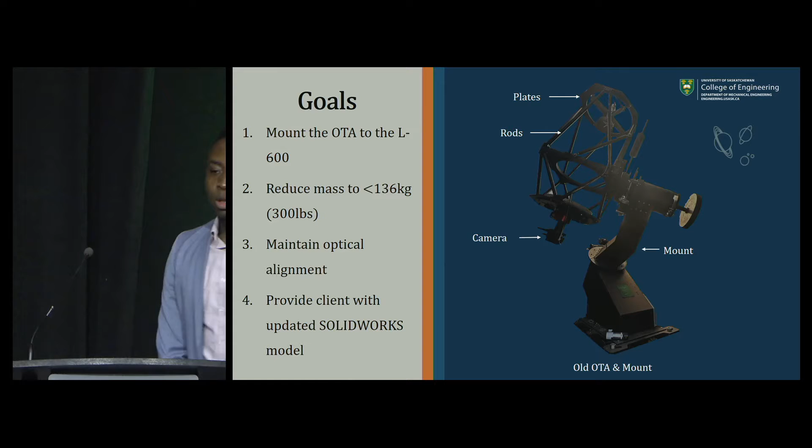In terms of goals for this project, our main goal was to mount the optical tube assembly to the newly purchased PlaneWave L600 mount. In doing so, we needed to reduce the mass of the optical tube assembly to be less than 136 kilograms, the limit of the newly purchased mount. Further than that, once mounted, we needed to ensure that the new optical tube assembly maintained optical alignment while in use and tracking. Finally, the goal was to present the client with an updated SolidWorks model in lieu of manufacturing.

Our design process began with ideation as well as literature review, where we utilized a weighted decision matrix to eventually converge on what's called a Serrurier truss design. The premise of a Serrurier truss design is allowing the weight of each individual mirror to be equally opposed around the optical axis, so each side is able to deflect equally and maintain collimation regardless of its orientation.

With that, we used what's called material indices to be able to finally define our materials. We desired that it has low thermal expansion, a high strength to weight ratio, low cost, and easy manufacturing.

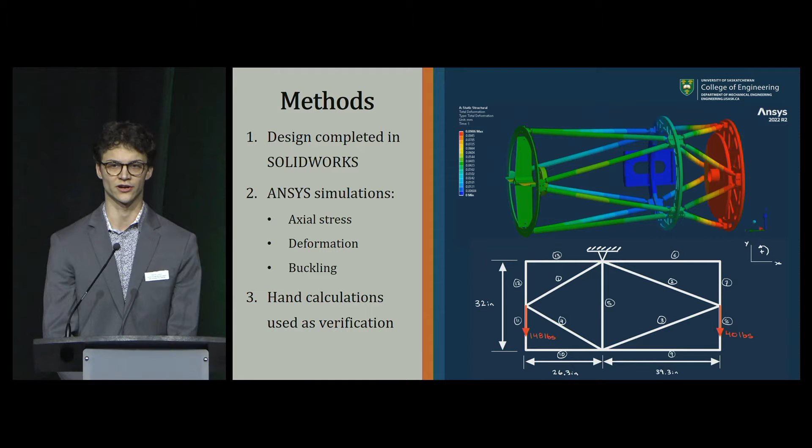From there, we utilized ANSYS and SolidWorks models to eventually converge on a final design while utilizing topology optimization as well as finite element analysis to iterate. When we came upon a final design, we used FEA, thermal analysis, as well as modal analysis to account for any possible direction or operating conditions our telescope would face. We used hand calculations to verify all of our individual analyses, and then we eventually converged on our final design.

As a result of the analysis, the final design features a Serrurier truss combining carbon fiber rods for its high strength to weight ratio and aluminum plates for its ease of machinability.

In order to achieve optical alignment, we had to minimize deflections to maintain optical alignment. Through various design iterations, we were able to arrive at a total structural deformation of 0.09 millimeters.

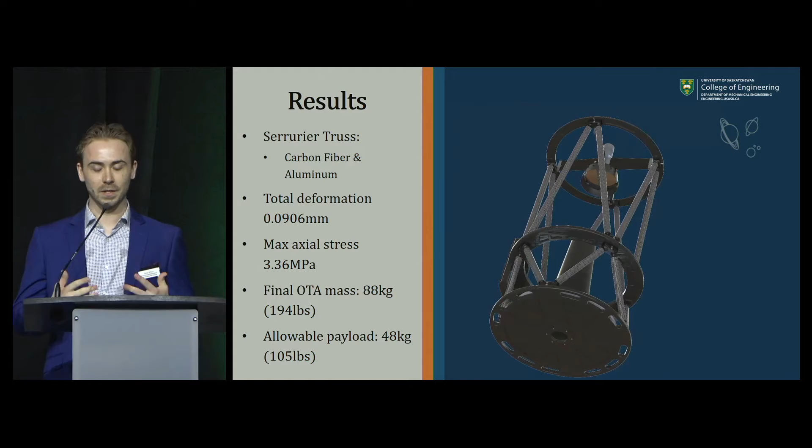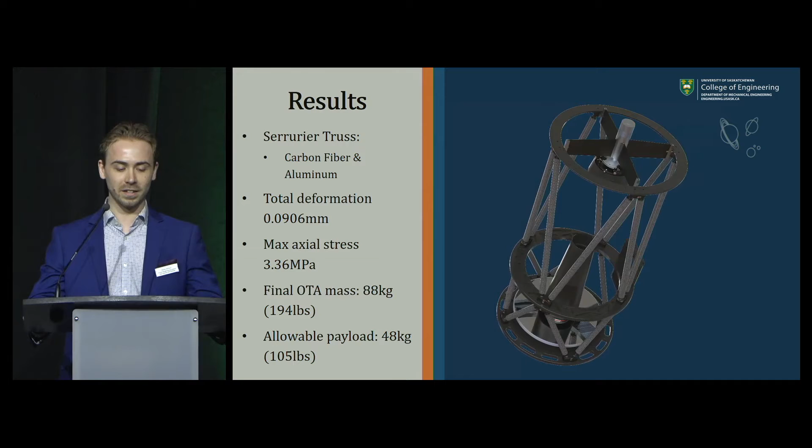Because we were designing primarily to combat deflections, the tubes were oversized from a stress perspective. Because of that, the resultant safety factor was 25.

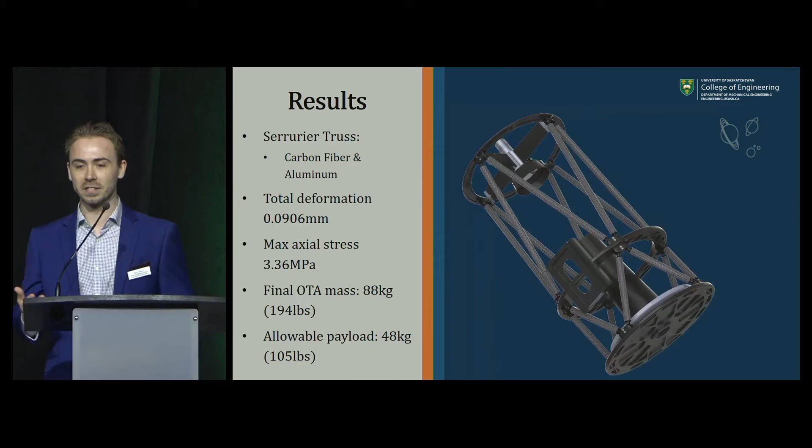The final design came in around 88 kilograms, which allows for an additional payload of 48 kilograms to be attached to the telescope.

Our final design has an estimated material cost of around $7,000, excluding manufacturing costs. This, compared to other telescopes on the market of similar sizes costing around $80,000 to $90,000, provides the university with substantial financial savings. With manufacturing to begin in the upcoming weeks, we plan to have this telescope fully operational and implemented at the university-owned Sleaford Observatory by August 2024.

Where it will be located, it will be hooked up to the Skynet International Telescope Network, where students, astronomers, and any of the public can remotely connect and make their own stellar observations and acquire their own data should they see fit.

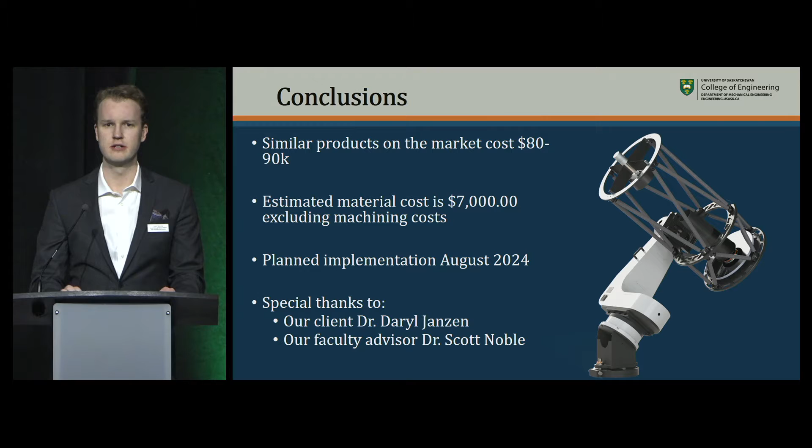I'd like to extend a special thanks to our client, Dr. Daryl Janzen, and our faculty supervisor, Professor Scott Noble, for their invaluable input and expertise through the duration of this project. Thank you, everyone.

Thank you, guys. That is incredible cost savings to do it for a tenth of what you could have done somewhere else. I'm sure the university thanks you for those savings.

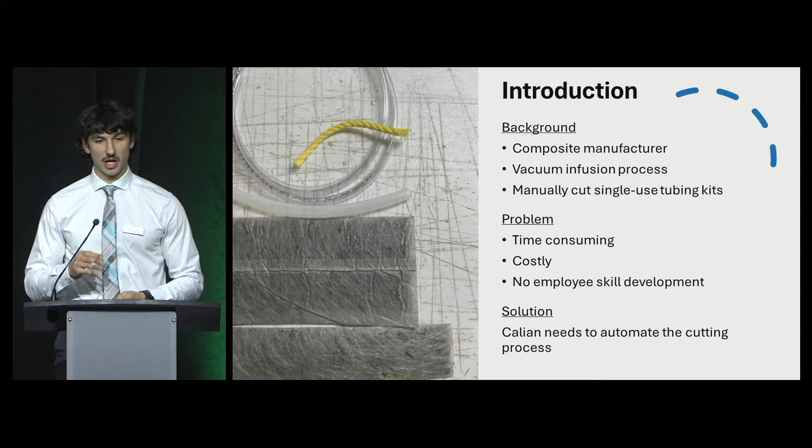3D printed rollers are then friction fitted onto the shafts of the rotary encoder and stepper motor. The cutting component consists of a guillotine blade and a linear actuator.

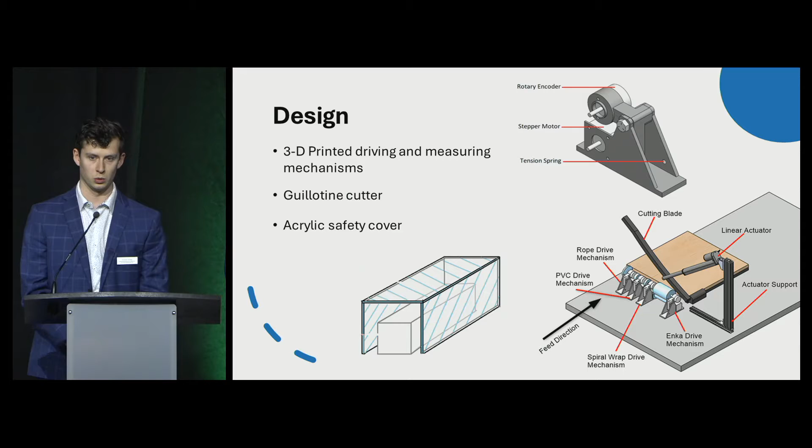We also have an acrylic safety box, which is clear and will cover all of the mechanisms, protecting the user from all moving parts. And finally, we have a Raspberry Pi microcontroller, which controls all of the parts at the same time. I'll touch on some of the benefits of our design.

The biggest one is time savings. By automating this process, we can take the average kit cutting time from 30 minutes down to 5. This translates to an $11,000 cost savings in labor per year and gives our product a 3-month payback period.

Additionally, our product is adaptable, and the modular design allows you to replace or add drivers and change the spools for whatever materials you're using, which allows our product to grow with the client. It also provides improved accuracy. The current method of cutting it by hand leaves a tolerance on the cut parts of approximately plus or minus 2 inches.

Our prototype device, we've been able to get it down to plus or minus half an inch, and we see further improvements by optimizing the code, which Calian has kind of agreed to do for us. Last is improved safety, so you don't have to worry about using manual shears that are unguarded. Instead, our device is fully enclosed and complies with the Canada Occupational Health and Safety Guidelines.

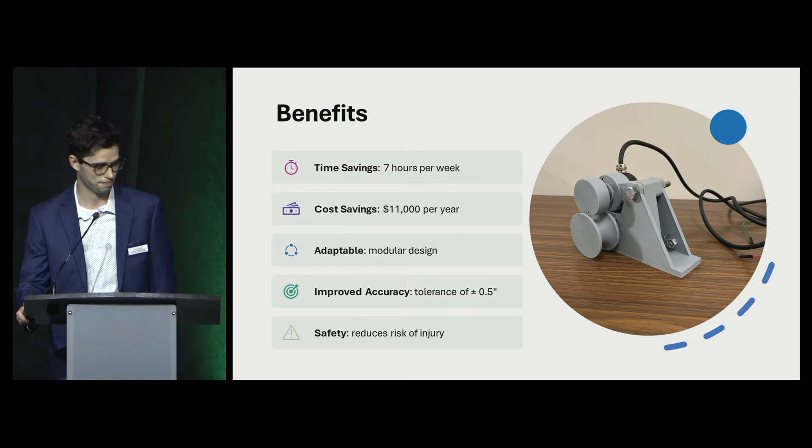Our client actually provided us with an impact statement, which I'll read now: The impact this device could have on our bottom line goes beyond just hours saved. Those hours can now be put towards innovation and testing, which allows us as a company to push the boundaries of the composites manufacturing industry.

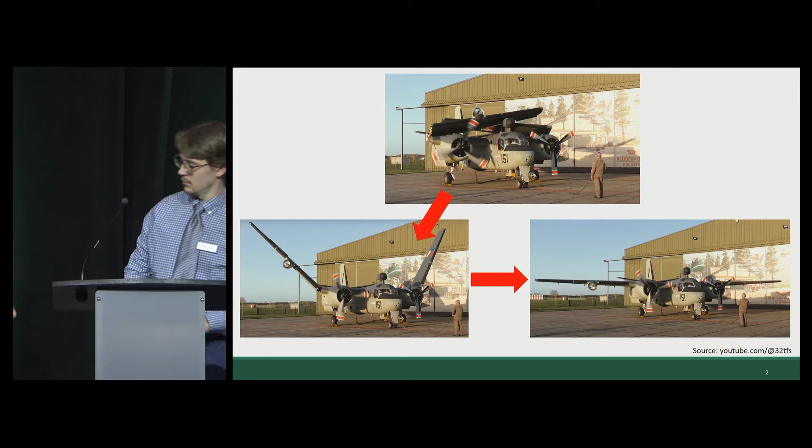This leads into the problem that our project sought to address. The Saskatchewan Aviation Museum required a design to fold and spread the wings of their CS-2F Tracker without the use of the aircraft's engines. Additionally, the design required the implementation of a fail-safe mechanism to prevent the wings from dropping in an uncontrolled manner in the event of any hydraulic failure.

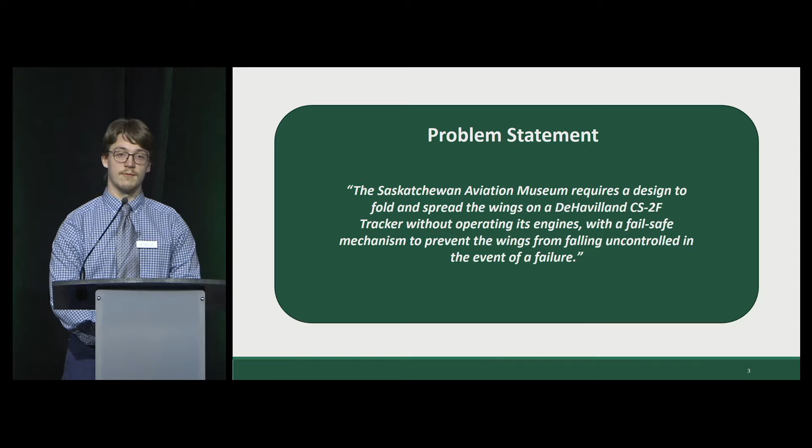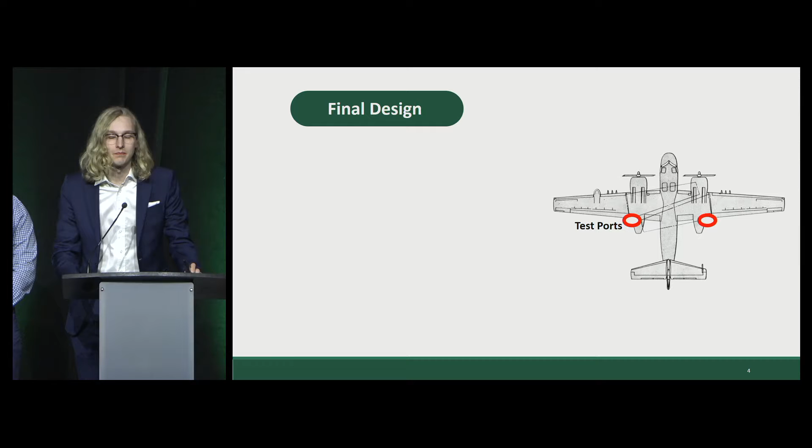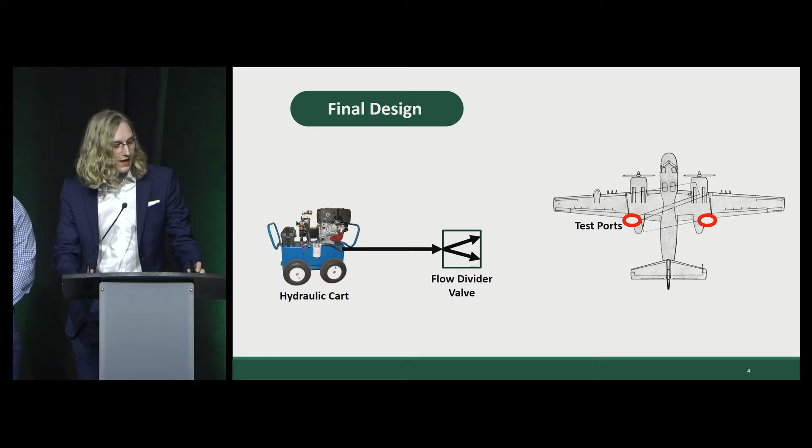The design that we developed builds upon hydraulic test ports that we located in the plane's landing gear wells. Our design utilizes a hydraulic cart that has a gasoline engine driving a hydraulic pump, and the cart also has a hydraulic reservoir. This gives fluid to a flow divider valve that sends power to both test ports, enabling us to fold both wings simultaneously.

Additionally, the design incorporates an electronic selector switch that allows the operator to select between folding and spreading of the wings from the cart. Without this switch, two more operators would be needed to select between folding and spreading, and they would have to be in the landing gear wells of the plane next to those test ports.

Finally, the design incorporates load holding valves in the form of pilot-operated check valves that ensure the safety of the museum staff operating the design and any patrons who may be nearby. These valves ensure that if hydraulic pressure is lost in the event of any failure, the wings will not fall.

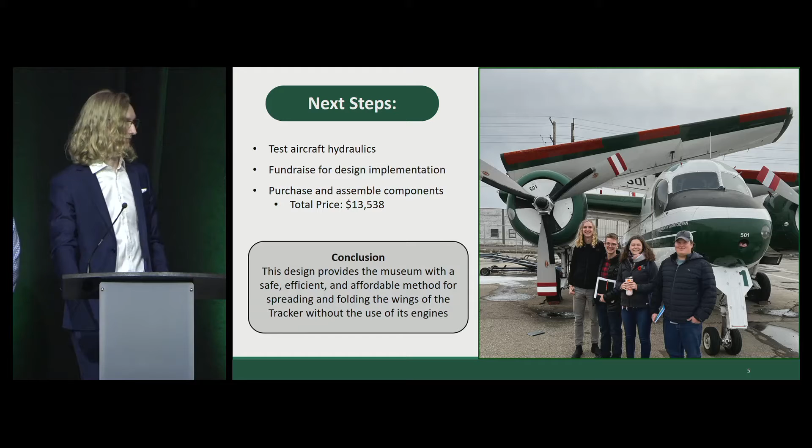With this final design delivered to our client, there are a few steps they will have to take to implement it. First, the museum will need to test the hydraulics inside the plane's wings to ensure they are in proper working condition and make any replacements required. Also, since the museum is a not-for-profit organization without current funds set aside for this project, they will need to fundraise the money needed to implement it.

They will then need to purchase and assemble the components, and our group has estimated that these components would cost around $13,500. We believe that this design provides the museum with a safe, efficient, and affordable method for folding and spreading the wings of the tracker without the use of its engines. Thank you.

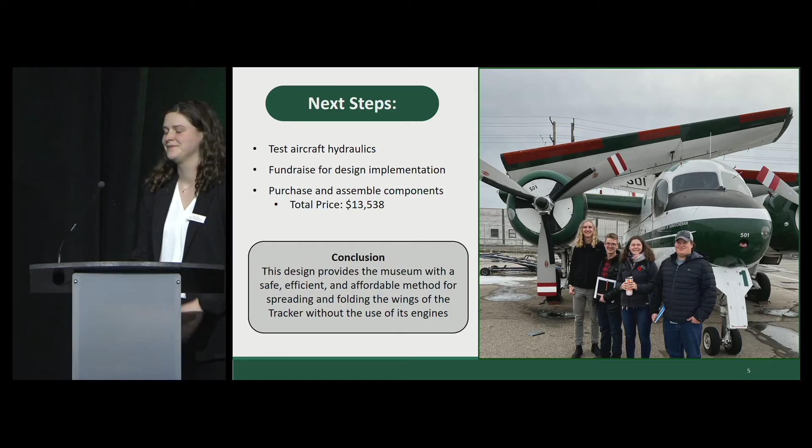Thank you, guys. What a neat project for a local museum. And I guess if we see a fundraising opportunity from them, we should all donate to it.

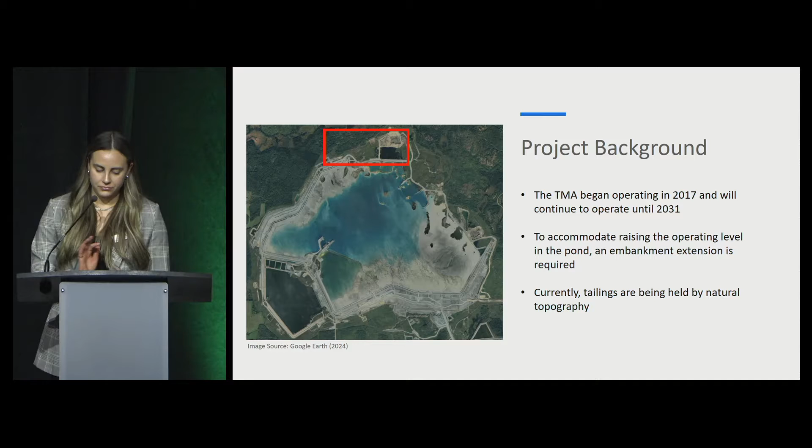To better understand our project, we wanted to know the geological story behind our site. To achieve this, we were provided with historical geological reports, borehole data, and CPT data from our client. By doing this, we were able to evaluate the ground conditions. Our newest layer is the Brenna Formation, which is a clay foundation, underneath the Whitemouth Lake Till, which is a thicker clay foundation underlain by a layer of silt, a layer of sand, and finally our bedrock, which undulates throughout the site. We are also given numerous lab test data to determine our material properties.

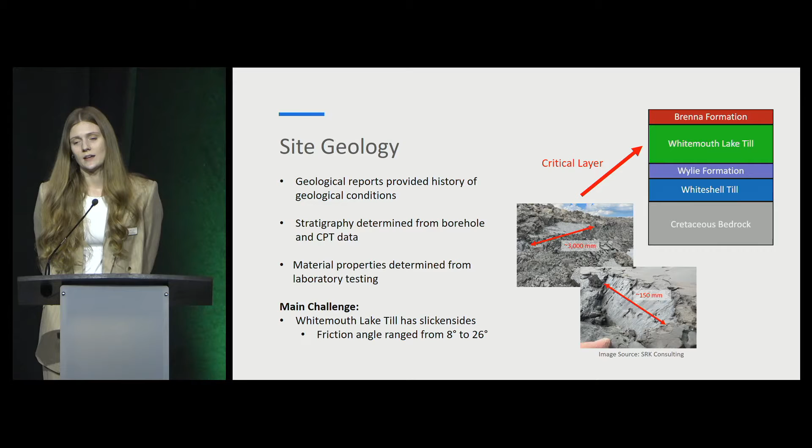Our main challenge with this site is that our thickest and weakest layer, the Whitemouth Lake Till, contained slickensides—areas of sheared material that are at or approaching their residual strength. To deal with this, we used our engineering judgment to come up with a phi of 15 degrees.

Once we understood the geology, we defined the alignment based on two considerations. First, the start point will be an extension of the existing structure, and the end point will be tied on the highest natural elevation in that direction. We divided the alignment into three segments for easier analysis in GeoStudio. The final length is 927 meters, and we have height ranges of 1 to 11 meters.

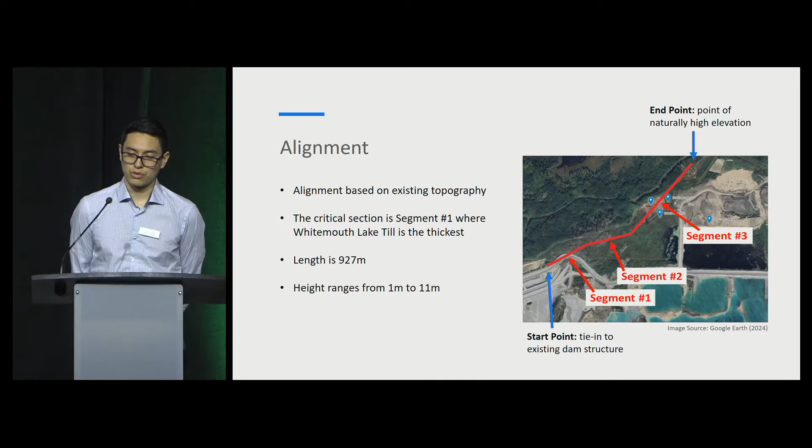Now, Gabby will talk to you about the modeling part. Our modeling process saw many iterations in order to meet factors of safety outlined by the Canadian Dam Association. To begin, our seepage modeling was used to determine the way the water would move through our structure. We used GeoStudio modeling for all the processes.

Seepage was done at operation and flood elevations. This was then paired with stability modeling for both upstream and downstream conditions under flood elevation, operation elevation, seismic conditions, and rapid drawdown. Lastly, our consolidation modeling was modeled for 1 meter lifts during construction, and stability was analyzed at both 50 and 100% construction.

So just to reiterate, the main challenge with this project is that we're essentially using a massive pit of jello as our foundation that's about 20 meters deep. So you can get a picture of how hard that would be to stabilize a dam on. Our final design is a homogeneous clay core with a rockfill shell.

We'll also install upstream and downstream berms as well as an upstream shear key. This cross-section is just for our first segment, where the clay is the most critical and thickest. For our second and third segments, we can remove that upstream shear key and berm to save on material cost.

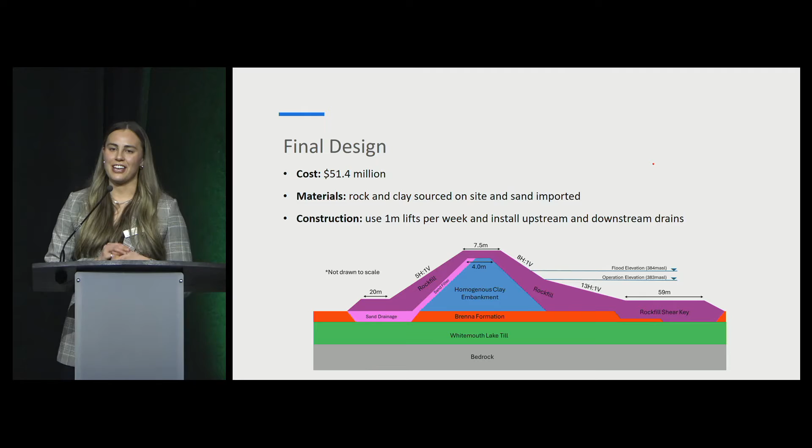In conclusion, we'd just like to thank our client for allowing us the opportunity to work on this very challenging and rewarding project, and thank you to our faculty advisor as well. Thank you.

Thank you. That is a massive project that I would love to build.

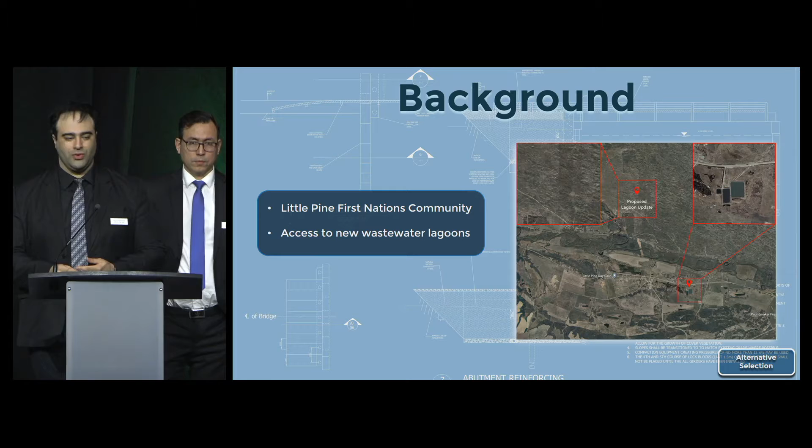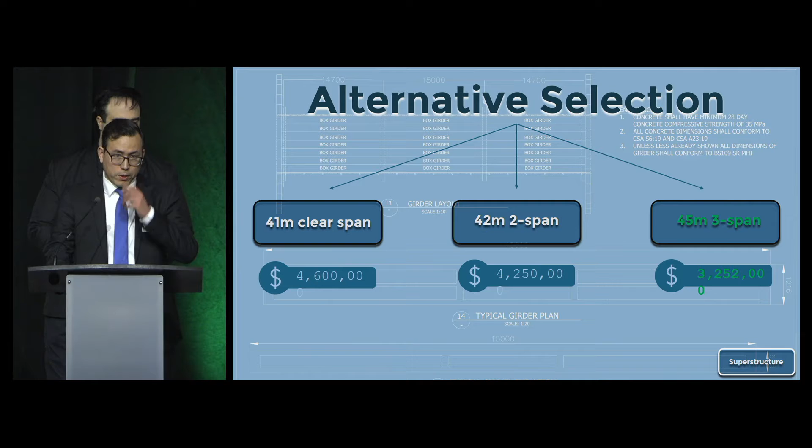Our team evaluated various options and configurations to develop a cost-effective design with ease of construction. We considered NU and pre-stressed precast concrete girders for our design alternatives, and came up with 3 design alternatives for our project, using a concrete girder box for all 3. The first alternative was a 41-meter single-span bridge.

This used special single void concrete girders with a concrete slab deck on top. One challenge we faced was procurement of the 41-meter long girders, as well as their transportation and erection. Additionally, the biggest problem we faced was the height of the abutment wall.

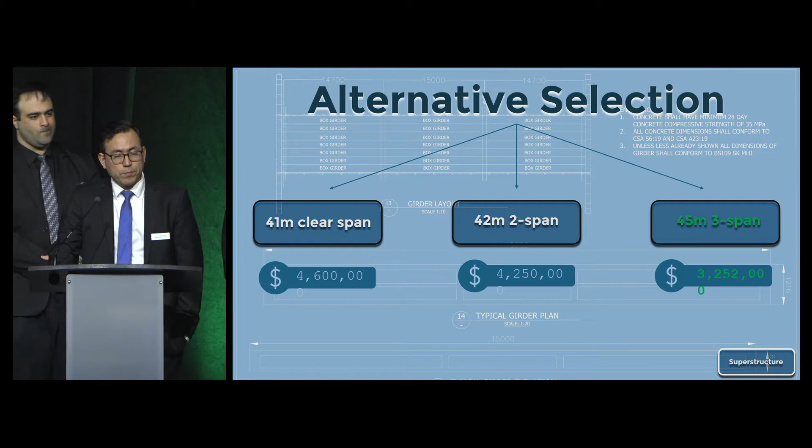In order to address these challenges, we developed a second alternative, a 42-meter 2 equal span bridge. However, this design introduced new challenges, namely having a pier in the middle of the river. Ultimately, we developed the final design.

The proposed design is a 45-meter 3-span bridge, constructed with 7 Saskatchewan box girders on each side. We conducted detailed design calculations to make sure the Saskatchewan box girders would be able to withstand the applied loads on the bridge.

We did this by following the standards from the Canadian Highway Bridge Design Code, as well as using SAP2000 software to model and analyze the bridge. Furthermore, the road leading to our bridge is a gravel road, so we suggest using gravel as a wearing surface to prevent any potential accidents.

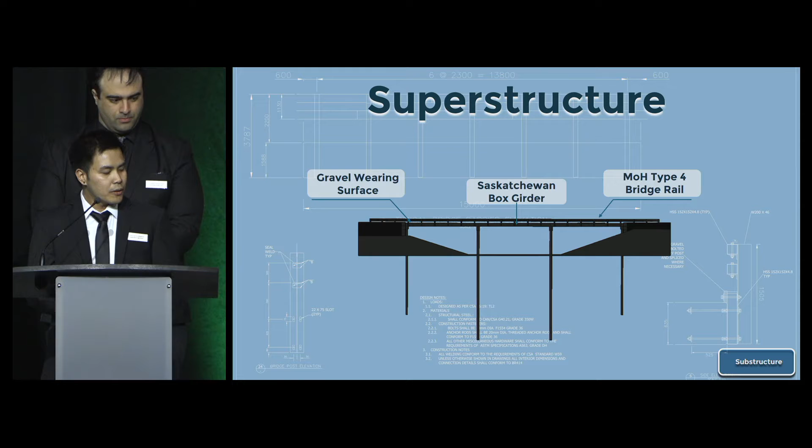In addition, our design includes a Type 4 bridge rail, extended by 5 meters on each end of the bridge to add an additional layer of protection for traffic.

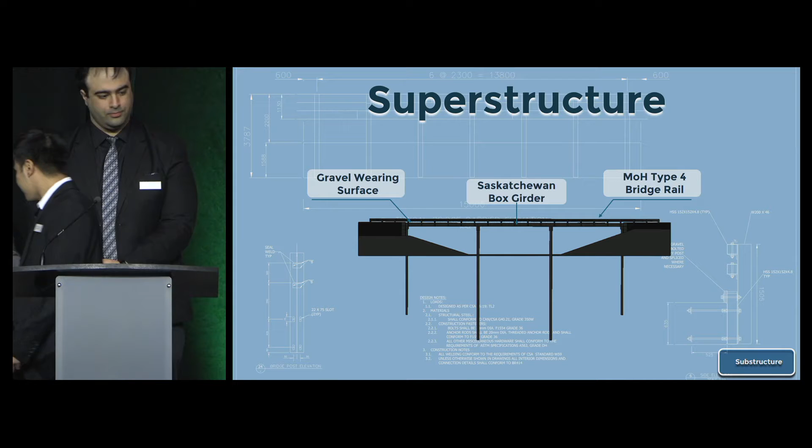For the substructure components of our bridge, for the deep foundations, we originally looked at 2 different options. We started by looking at continuous flight auger piles and then steel pipe piles. We found during our cost estimating that the continuous flight auger piles were cheaper, but due to the cost of construction as well as availability of rigs, we elected to go with concrete-filled steel pipe piles.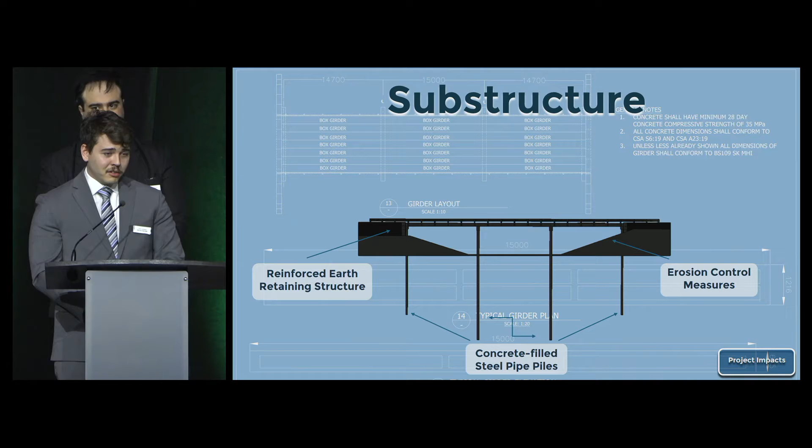For our earth-retaining structure, we looked at 3 options. We started with the Ministry of Highways standard design, then moved to a precast MSE wall with a steel grid. Finally, we looked at a lapped geotextile MSE wall with a lock block wall facing. We found during cost estimating that the lapped geotextile with the lock block wall facing was the most cost-effective design.

We have divided the impacts associated with our project into 3 categories: environmental, societal, and economical. For the environmental impact, construction of a new bridge requires consumption of high levels of energy and has carbon emissions. To account for that, we incorporated the use of prefabricated materials sourced from local manufacturers to reduce our carbon footprint as well as reduce environmental impacts.

For societal and economical impacts, there is new infrastructure in the community and access to a new wastewater treatment facility, potential for economic growth and further development on the north side of the community, as well as more road access for local community members and farmers.

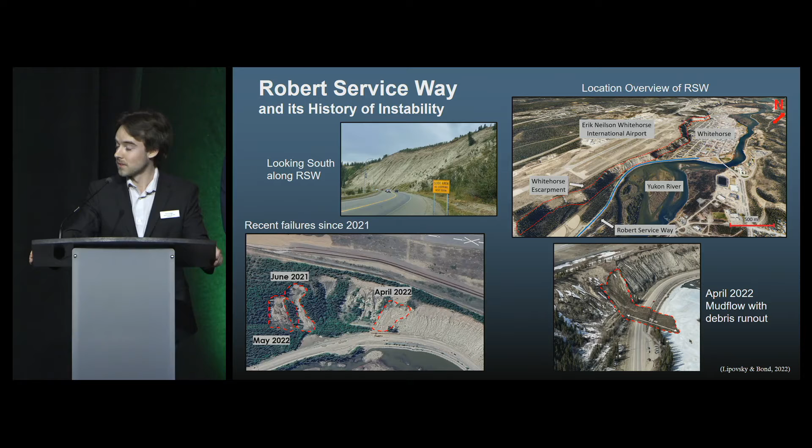So when discussing the site geology present, there's three members that we need to discuss. First, there's a thin sand layer. Now this overlies a much thicker silt layer. The interface between these two layers is actually the root cause of a lot of the instability we see along the escarpment. There's a third layer.

Now this is a colluvium layer. It's deposited parallel to the slope angle. Colluvium is a mix of waste, basically sand, silt, and organic matter.

So what's happening is that in runoff events like the spring melt or heavy rainfall, water is permeating through this sand layer, but it can't infiltrate the silt at an equal rate due to differing hydraulic conductivities. So this is effectively shooting water out of this interface into the colluvium. When colluvium becomes saturated, it fails, and it's using the silt as a sliding plane.

You can see that in the mud flows shown above. The June 2021 mud flow is actually a pretty good example of a textbook mud flow. You can see the source area, you can see the main track, which takes place as erosional gullies along the slope face, and then the depositional area. In the case of the April 2022 mud flow, that was the road, and that's what we're trying to eliminate with our alternatives.

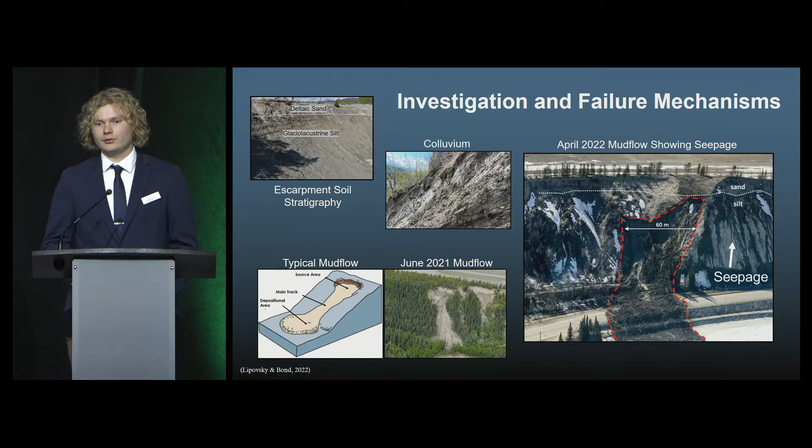Our group came up with three alternatives based on three main objectives. First, limit seepage onto slope. Second, stabilize surficial sediments. And third, lower the risk of shallow gravity failures.

Our first alternative consists of the construction of an MSE wall. Our second alternative is regrading the slope and then installing geocell throughout the surface of the slope. And finally, our third alternative, and the one we chose, consists of the installation of a horizontal drainage system in the sand and silt interface.

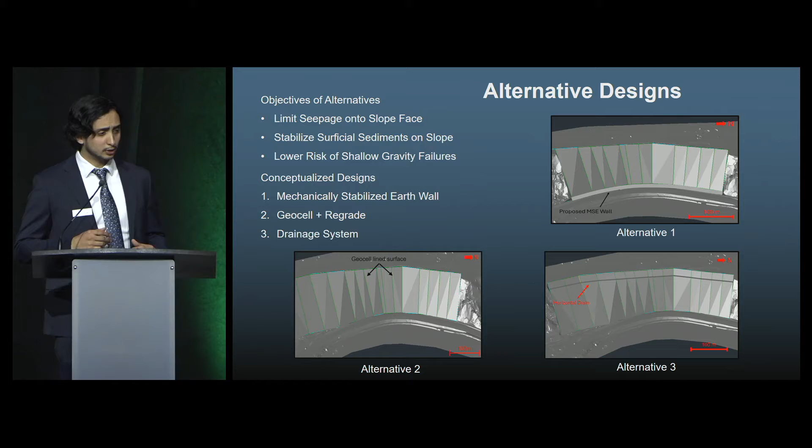Additionally, the slope will be regraded from an existing average angle of 36 degrees down to an average angle of 30 to 31 degrees. After doing all of this, the slope will be hydroseeded to allow vegetation to flourish and limit the risk of superficial erosion.

Okay, so yeah, our drainage system was comprised of three different components. The first component was three sets of near horizontal drains that are placed at the sand silt interface to capture the seepage as it exits the slope. These drains consist of free draining granular fill as well as 24-inch perforated pipe to allow for fluid flow.

Each set of horizontal drains will flow to a central downslope drain, which will carry the water safely down the slope. Since the angle of the slope is between 25 and 35 degrees, these drains will be filled with riprap to dissipate the energy of the flowing water.

Once the water hits the toe of the slope, it will be passed under Robert Service Way via culverts. In the figure there, it shows the culverts in red, the downslope drains in purple, and the horizontal drains in orange. In addition to our drainage system, we'll be regrading the slope, which will help lower the angle of the slope by 5 to 10 degrees, as well as remove much of the colluvium that is residing on the slope surface.

We used SLOPE/W to model the effectiveness of our design, and by implementing the drainage system as well as regrading the slope, we increased the factor of safety against failures from 0.8 to 2.1.

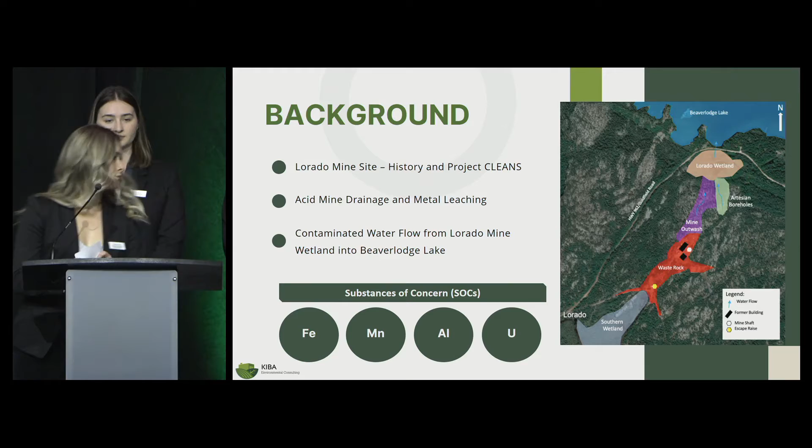So to remediate, we looked at a bunch of different options. We looked at a permeable reactive barrier, an anoxic limestone drain, a combo of those two, and a constructed wetland. By looking at our cost, our efficiency, and our long-term permanence, we decided on the permeable reactive barrier, or the PRB. So you can see our design here.

It starts with 2 impermeable clay walls and a gravel pit. This will force the water into the reactive gate and through all those layers so it comes out clean to Beaverlodge. We start with a geonet that's permeable.

This will hold all our materials in. A 1-to-1 sand anthracite mixture will capture all the precipitates already in that outlet water to protect our next layer, Mayenite. Mayenite is a new material used as a mineral phase change to target oxyanions, which is what our uranium is. Next is our biggest layer, limestone.

This is going to use precipitation to target all of our cations. Precipitation will start first at a pH of 3 for the iron, 4 for aluminum, and finally 8 for manganese. One more sand anthracite mixture is going to capture all the precipitates that come out of that limestone. Finally, our last reactive layer is peat moss.

The pH is going to be around 11 after that limestone layer, so the peat moss will bring it down to about a 7 to 9 to make it more neutral. Finally, the system closes with one more permeable geonet.

The total cost estimate to construct the PRB is roughly $3.2 million.

The PHREEQC model was used for geochemical analysis, which provided the chemical speciation of the SOCs. The results indicate a positive saturation index for uranium, meaning Mayenite will cause it to mineralize.

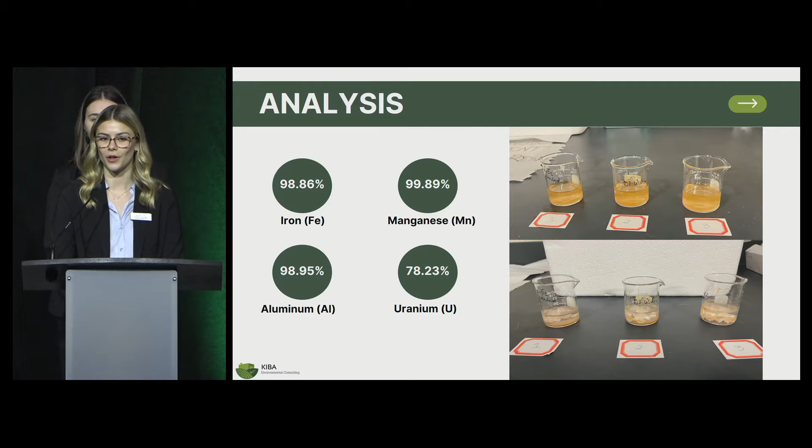In summary, to target iron, aluminum, manganese, and uranium, we have designed a PRB system consisted mainly of limestone and Mayenite to remediate the acid mine drainage impacted site. It will cost $3.2 million and take less than 3 months to construct.

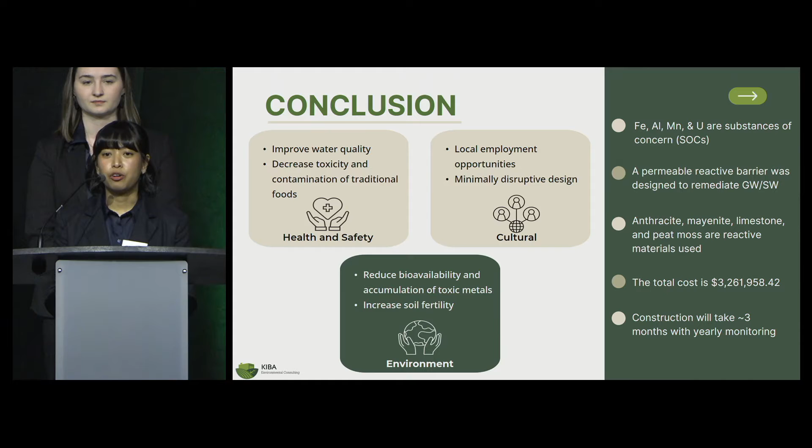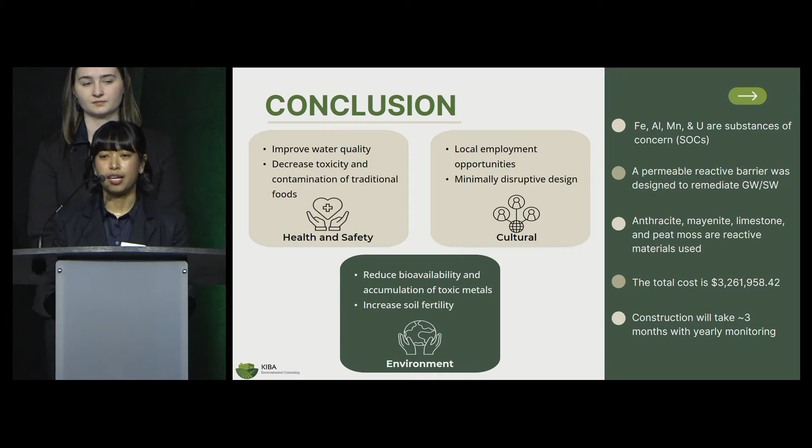Through this, we will see improvements in the water quality and the health of the ecosystem, decrease in toxicity and bioaccumulation, and the creation of local job opportunities. Additionally, when compared to the emissions generated over the operational lifespan of a mine, the emissions from the project are negligible. We would like to acknowledge our client SRC and our advisors, Professor Dr. Wanjay Cheng, for their help.

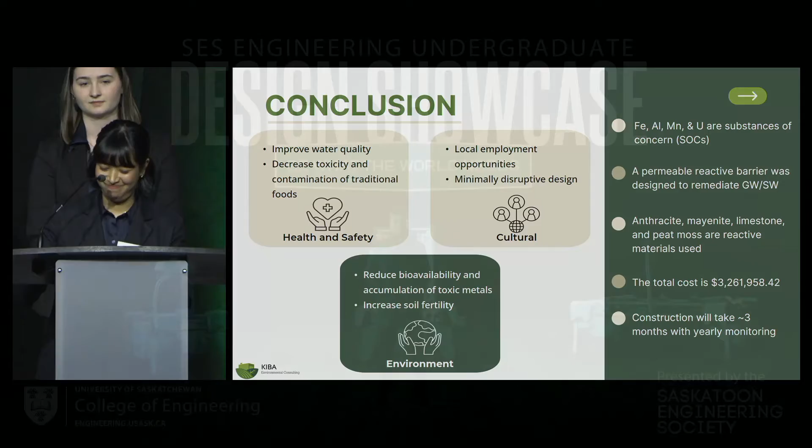Thank you. I just want to say how incredible it is to see an all-female team. That was awesome. Okay, we've heard from about half of our teams, so we are going to take a quick little breather for a few minutes here. You can stretch your legs, get a drink, and I believe some dessert will be served as well. So we'll see you back in about 10 minutes.

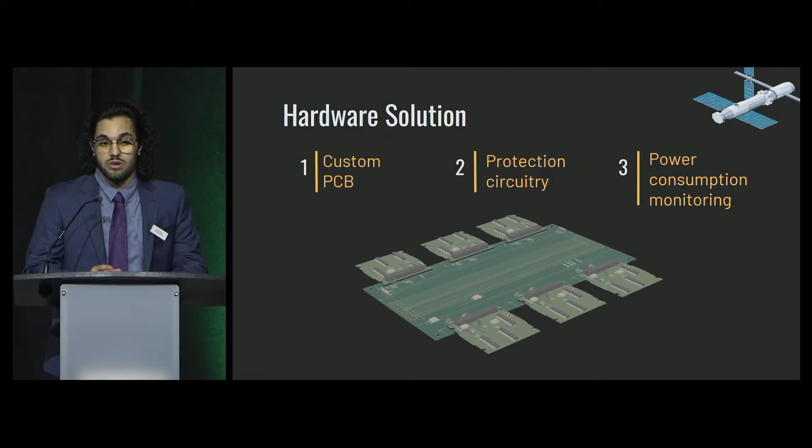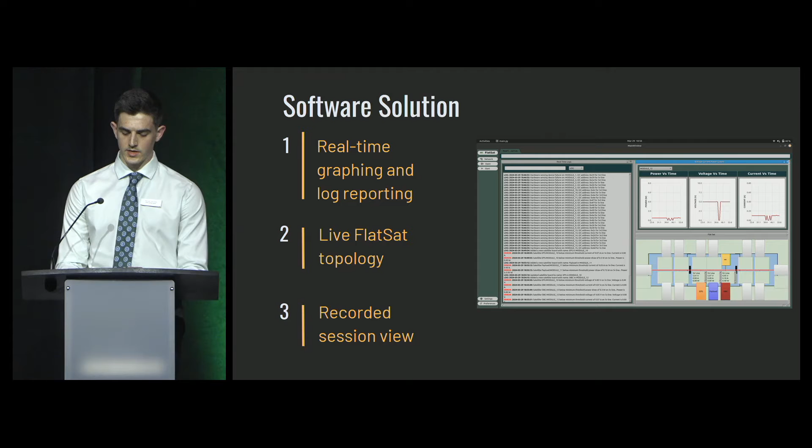These events are under voltage, under current, over voltage, and over current. An example, as seen on the slides, is under current, where the logs have shown up in the log display. The system can also provide a historical session view of recorded values. Through these features, we expedite the testing process and improve its quality.

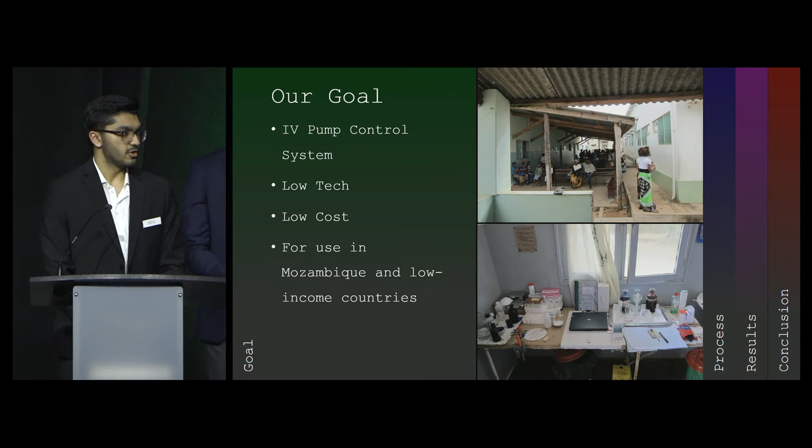Okay, so for our design process, we have 4 major design constraints. The first one is that the cost must be below $300, as the typical IV pump can range from $500 to $3,000 or more. The second was that the parts must be easily sourced, so that if a component were to break down, they could easily replace it.

The third one was an alarm system must sound when the bag is 80% empty. This is an important safety feature as it wouldn't allow the pump to keep running when there's no fluid in there. You don't want to pump air into a human body.

And the fourth one is that the backup power supply must power the system for 2 minutes. This is in response to the outages in Mozambique and their electrical grid not being as stable.

We used alternative analysis to basically decide which components would work best with a decision matrix. And for our design iterations, we mainly had trial and error, but we were able to complete our prototype.

So for our results, we got a cost down to about $124, which is quite significantly lower than what our target goal was, which was around $300.

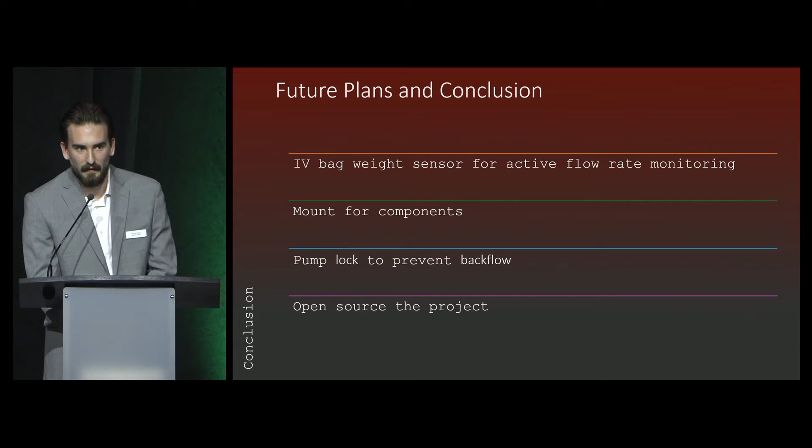That's all we have. I just want to thank our client, Dr. Adam McKins, and our supervisor, Chandler Jansen, and thank you for listening.

Thank you, guys. That was incredible. I was lucky enough to be in Mozambique and have experienced those power outages and heard from people there about how that really affects clinics and healthcare with the outages, so that's amazing.

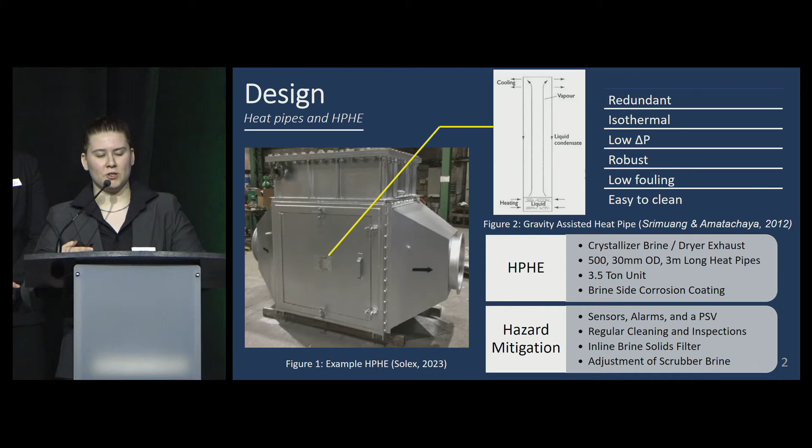When this automated cleaning system is activated, it would put a spike in particulate matter in the exhaust. So the scrubber brine following the heat exchanger should be increased to make sure those particulates don't make it out to atmosphere.

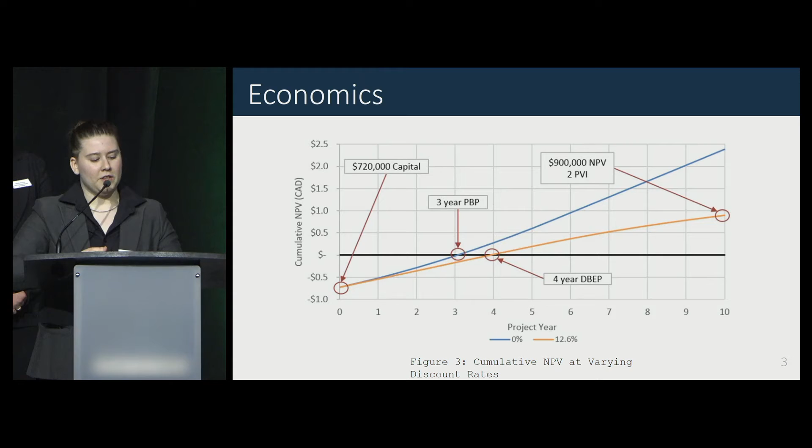We found that the payback period for the project is 3 years, but taking into consideration the time value of money, the discounted break-even period is 4 years. The net present value of the project is $900,000, and a present value index of 2 indicates that Nutrien will double the investment they put into this project over 10 years' time.

This project has many benefits if implemented. Some environmental benefits would be an energy savings of around 1 megawatt, equivalent to around 113 cubic meters per hour of natural gas, leading to a CO2 emissions reduction of around 1,568 tons per year. To put that into perspective, that's around 350 Olympic-sized pools, so it's quite a lot.

Some economical benefits: for Nutrien, it would be a more energy-efficient mill, leading to lower operating costs, and it's also good positive publicity for them. For a vendor, this is product exposure, which can potentially lead to additional sales. For social benefits, this project is a good green corporate example, and it can also improve the air quality around the community surrounding the mill.

In conclusion, we collaboratively designed an economical waste heat recovery system at the Nutrien Allen Potash Mill. We got our natural gas savings down to 113 cubic meters per hour, and we reduced our CO2 emissions by around 1,568 tons per year. We completed a Class 4 economic analysis with a capital cost of around $720,000 and a PVI of 2.

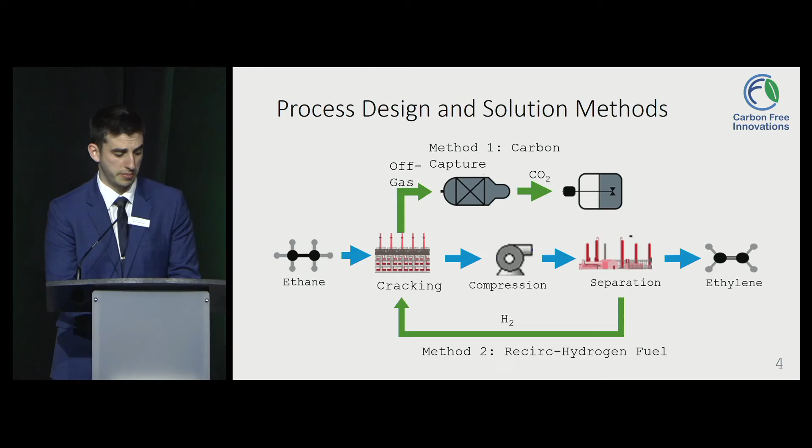As a result, we decided on our carbon capture units, and I'm going to pass it off to Kaden to talk a little bit more about those.

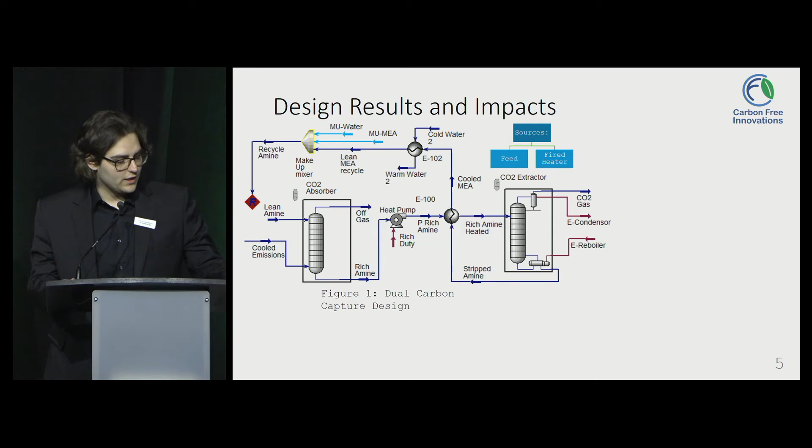What we're looking at here is our process flow diagram of our dual carbon capture unit, which tackles two feed sources, as Joel mentioned: the feed and the fired emissions from the heater. This uses monoethanolamine in our CO2 absorber, which has a high affinity, about 30 weight%, which is then extracted with a high pressure column in order to put into the ground or sequester.

Some of the socioeconomic impacts: we compared the methane cost per ton CO2 captured, which was around $139 per ton, versus the nuclear or geothermal cost per ton CO2 captured at $116. This $23 decrease in cost per ton allows us to change the carbon-free price of ethylene, which can make our carbon-free plastics much cheaper.

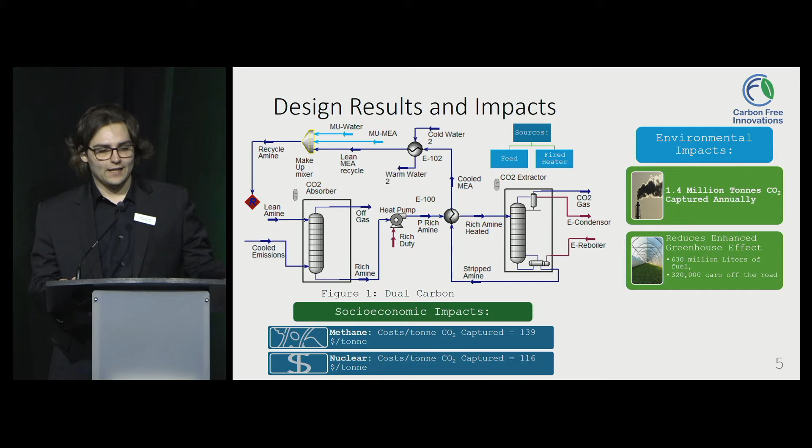Now just a bit into our environmental impacts. This design captures 1.4 million tons of CO2 annually, which is attributed to about 320,000 cars off the road annually. It also reduces the enhanced greenhouse effect affecting our planet, and reduces our carbon plant footprint.

Now just some project conclusions. Why this project? As Dow mentioned, to become the net zero ethylene plant—ethylene is the key ingredient in polyethylene, which is used in the plastics industry, so carbon-free plastics is part of the world's goal.

What is our design? Well, we looked at two methods, method 1 and method 2, where method 2 is the hydrogen recirculation. We decided to go with method 1, the dual carbon capture on feed and fired heater emissions, which resulted in about 1.4 million tons of CO2 captured annually.

The indirect environmental impacts allow us to reduce climate change by slowing down the temperature rise, as well as reducing extreme weather events, so droughts and hurricanes are less frequent, and improving air quality by removing those criteria air contaminants, so less smog and less acid rain.

Finally, why net zero? The world needs net zero because it is key to keeping the climate steady, saving nature, and making sure the economy grows in a green way for the kids of tomorrow.

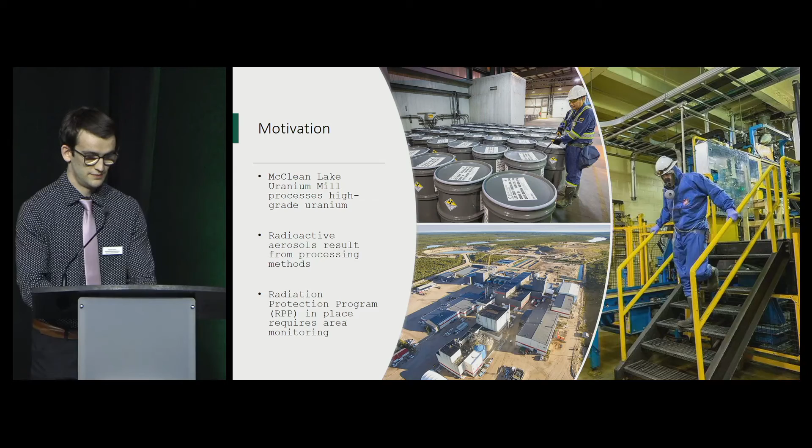ARMA came about due to an issue at Orano Canada's uranium mill in northern Saskatchewan, the McClean Lake operation. Currently, technicians at the mill take aerosol readings to ensure radiation levels throughout the mill are within safe working levels. However, technicians taking these readings are both prone to human error and can be put at risk for overexposure to these aerosols.

Aerosols such as radon progeny and long-lived radioactive dust, which are prevalent throughout the uranium mill, when ingested or inhaled, can lead to chronic health effects such as lung cancer many years down the road, due to the aerosols depositing their entire radioactive dose over their lifetime. Therefore, a method to automate these manual readings is required.

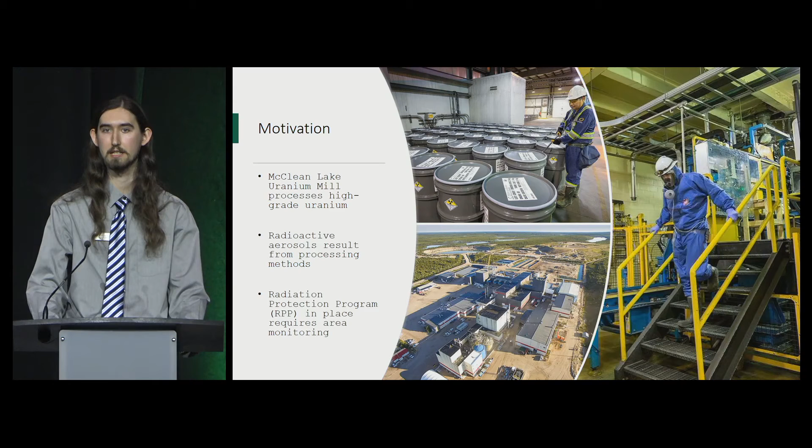At the mill currently, technicians take aerosol samples by blowing air onto a piece of filter disc. This disc is then placed into a TriMet sample counter, from which technicians infer information about radiation levels throughout the mill. However, as one might imagine, it's quite a large mill, and this can soon become very labor intensive.

So our solution had to reduce the amount that the technician had to interact with the sample taking device. Therefore, we replaced single-use filter discs with a continuous filter roll, as well as automating the calibration procedure for both the sampling pump and the sample counter, meaning the technician only needs to interact with the design when replacing the filter roll.

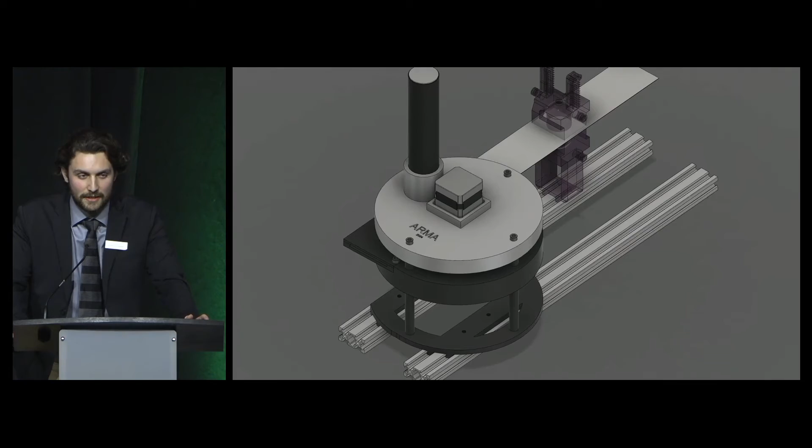The way we implement this automated design can essentially be boiled down to two main components, each mounted on two parallel CNC rails. The first is this component here, FRED, which stands for the Flow Retention Enclosure Device. It essentially moves up and down, creating an airtight seal around the paper so that air can be pumped through it, collecting a sample.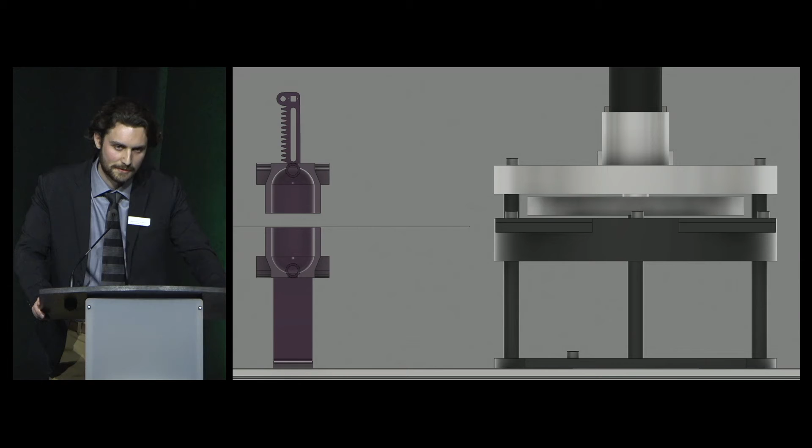ALARA stands for as low as reasonably achievable, and we took this seriously in our design. We chose to have these components hewn from single solid blocks of aluminum so that they attenuate the radiation thrown off by the americium source, therefore protecting nearby workers or persons.

The ultimate goal of this project was to automate the measurement of radioactive aerosols, and in this regard we believe the system has succeeded, with successful measurement of alpha radiation inside of ARMA. We project a quadrupling of sample-to-sample efficiency with this system compared to the manual method.

And when you consider the scalability of our solution, we project a 29-fold increase in total sampling capacity at the McLean Lake operation. So while there is a lot of work to be done before this can be considered a commercially viable safety instrument, we believe we've laid a strong foundation for a more capable, reliable, and efficient way to protect workers from lifelong, life-altering chronic illnesses. Thank you.

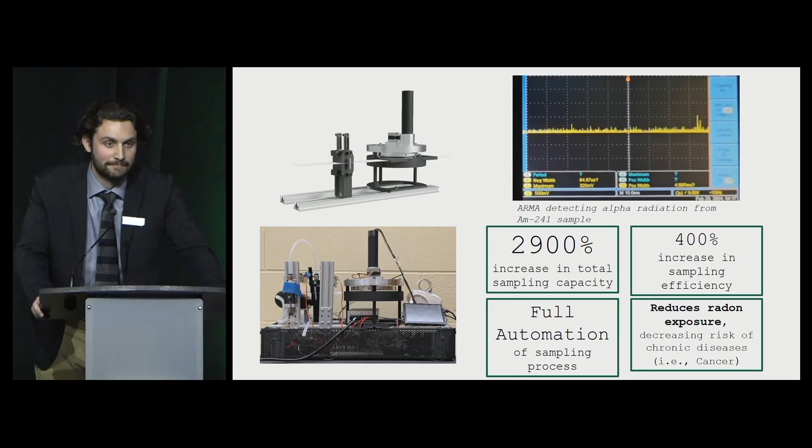Thank you. I will make sure I look for Fred and Rosa if I ever make it back to do work up at the uranium mines.

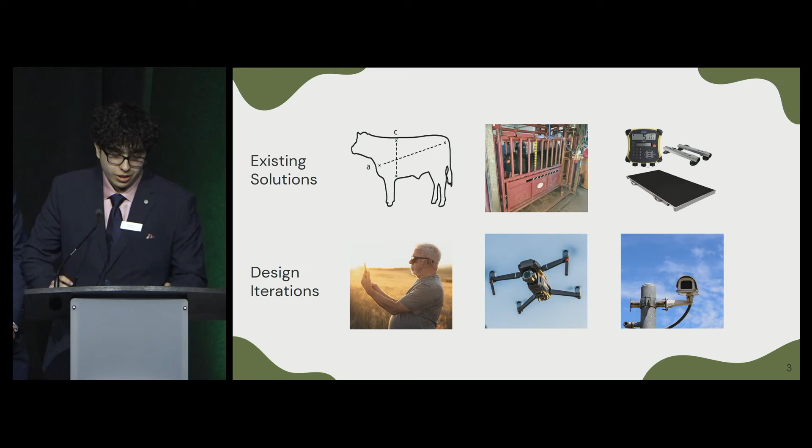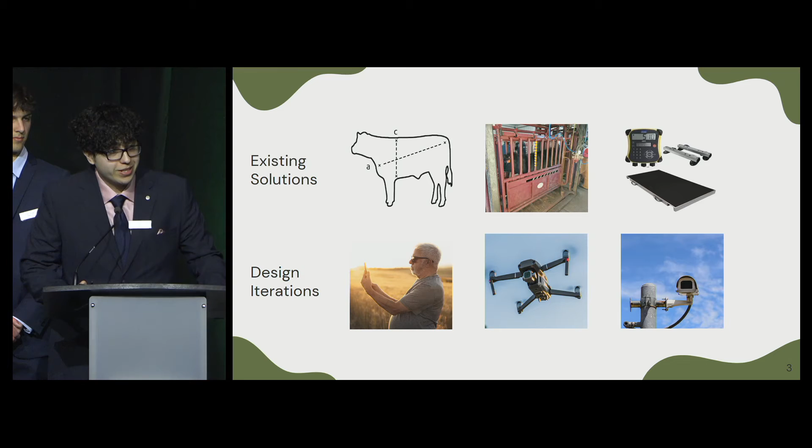Let's look at existing solutions. Smaller farms use manual estimation techniques, which can be inaccurate. Traditional methods like a cage-like chute scale are so stressful that cattle don't eat for days. Newer technologies such as walkover scales aren't widely used because of how unreliable they can be. So we began looking at our own solutions.

Our first idea was to let farmers take pictures of the cattle using their phones. However, after talking with farmers, we realized we needed a fully automated process. Then we thought about using drones, but realized they would scare the cattle. Lastly, we considered open area cameras situated near water resources. This seemed most promising since it could capture a large area, but gauging distance and acquiring proper measurements would be too technologically difficult.

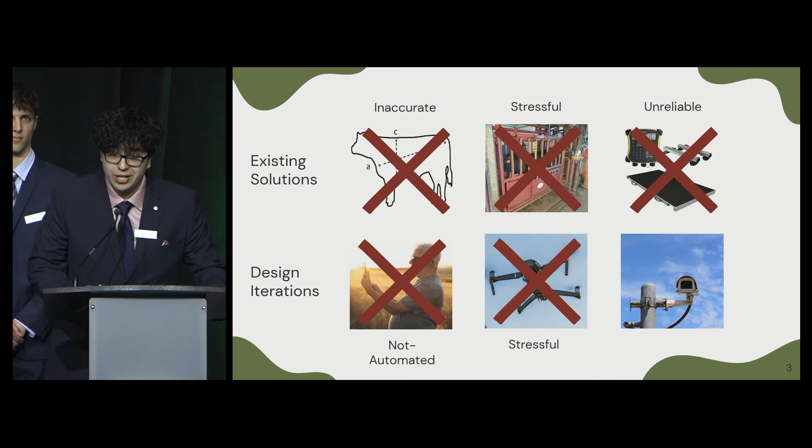So in order to be successful, we knew our design must be fully automated, stress-free for both the cattle and the farmer, frequent, and reliable.

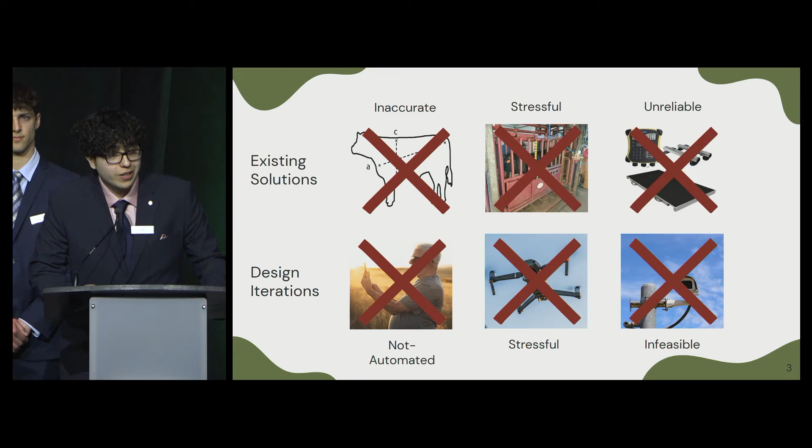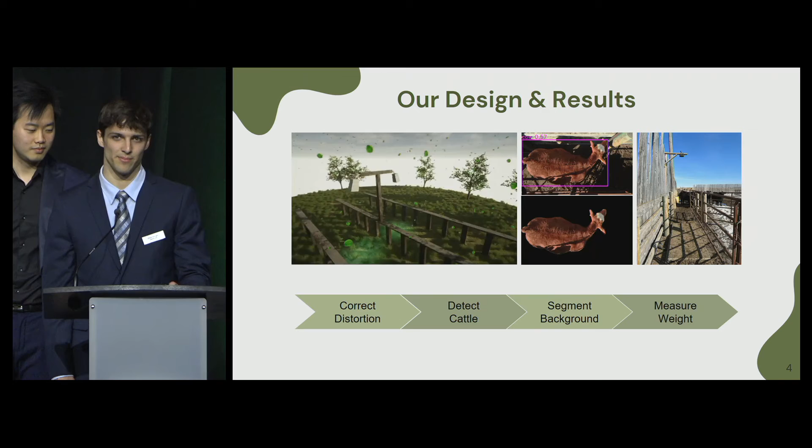Based on these criteria, we developed our design, which uses an overhead automatic camera to image the cattle as they walk through lanes. These lanes are constructed near water resources so cattle intuitively walk through them, allowing weight measurements to be taken without obstructing their day-to-day activities.

Once we have the images, they're processed using a 4-stage software program: distortion correction, animal detection, background segmentation, and finally weight measurement using our artificial intelligence model. Using this model, we've achieved 85% measurement accuracy using only 2-dimensional images, and we have clear steps to improve this further.

You can see on the slide our physical implementation of this design, which also has a walkover scale. With this scale, we're able to get ground truth measurements to test our design and further develop it so we can make even better measurements.

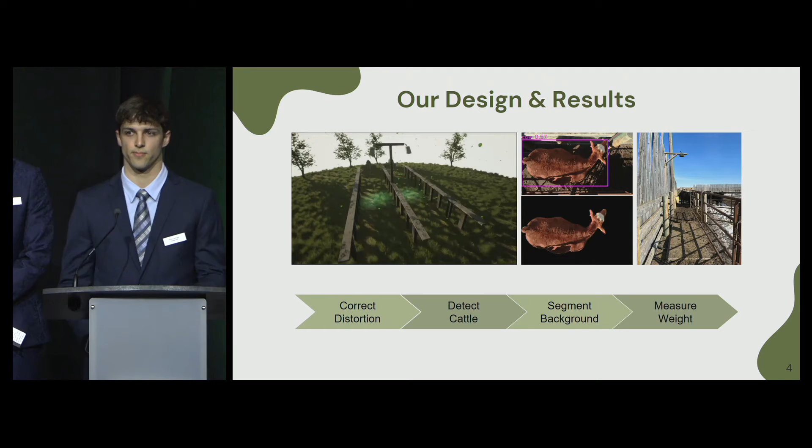We have clear plans for commercialization. First, we want to improve our model, create a better data set, apply for funding, and then hopefully have a market viable software.